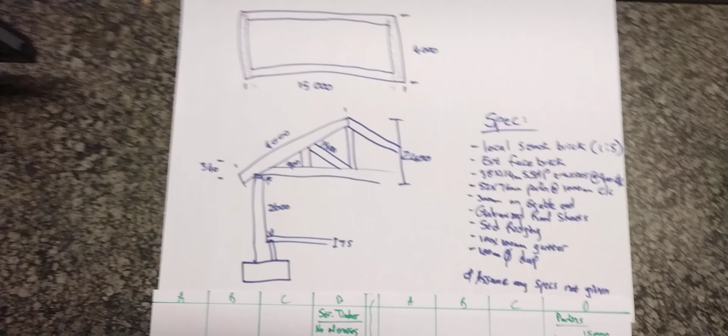Okay, so now that our brickwork is done, we can move over to our timber, our woodworks.

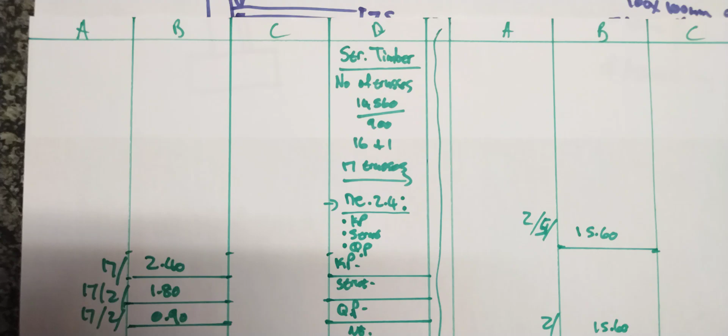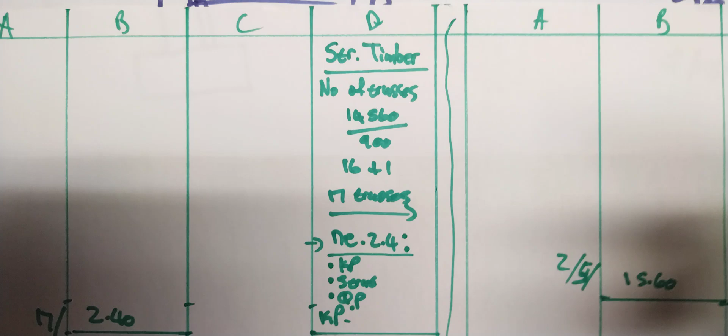Okay, number one on our list with regards to timber, we need the number of trusses. As we've seen in our specs, our trusses are at 900 center to center spacing, and our truss will sit in between the section on the wall plate. Because here we've got brickwork, our trusses don't sit outside of our building, they sit within our roof space.

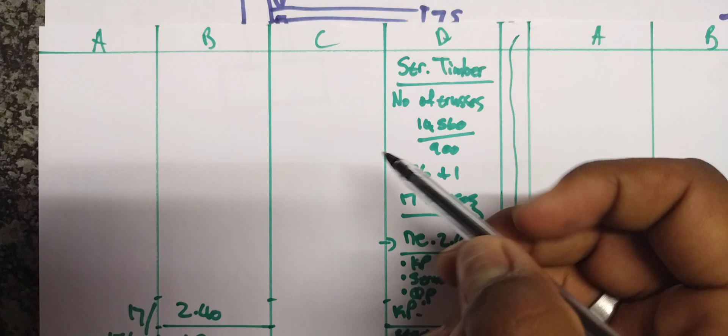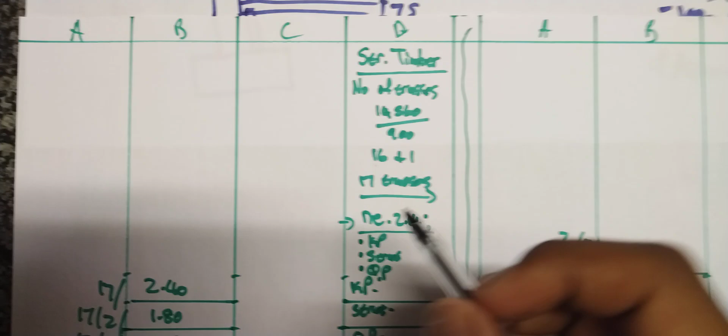So this is our length divided by our spacing, which gives us about 16. Then we will always add 1 to our tally, and we get 17 trusses. That's just a rule of thumb - we will always add 1, so whatever it is plus 1.

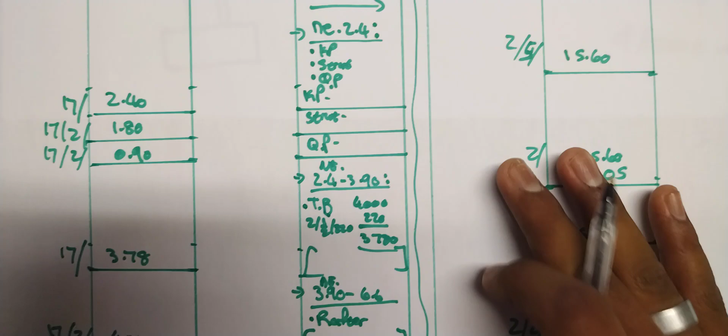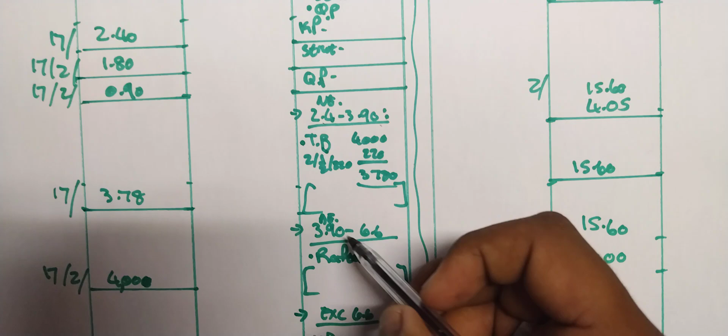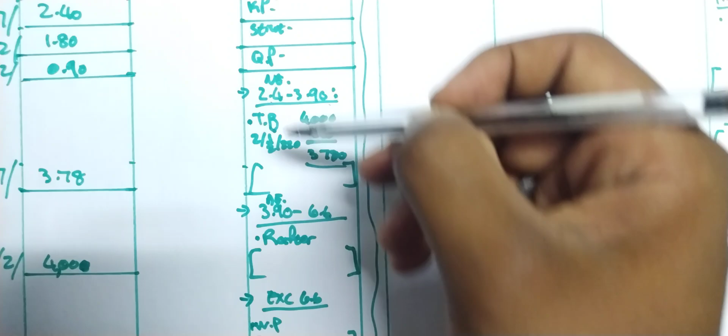Okay, important to note, we've got brackets when it comes to our timber, just to have everything in order. We've got not exceeding 2.4 meter, not exceeding 2.4 to 3.9 meter, not exceeding 3.9 to 6.6 meter, and exceeding 6.6 meter. That is our 1, 2, 3, 4 sections of our roof truss.

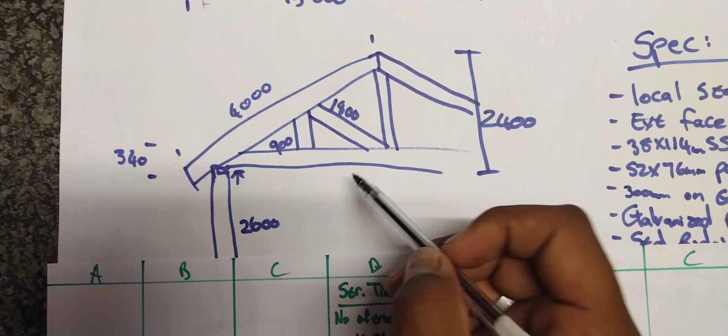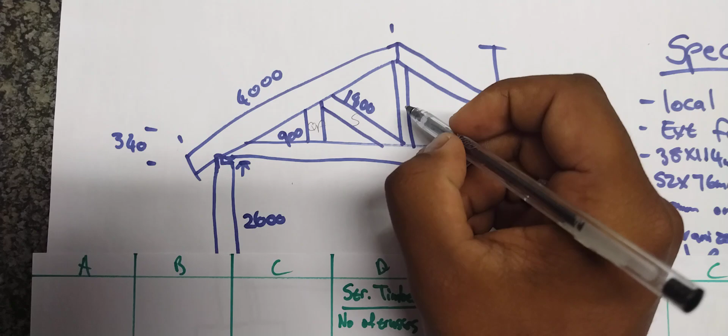Okay, so for not exceeding 2.4, we will come to our diagram here. Then we will see all our measurements under 2.4. So then we will see that our strut, our queen post, and also our king post are within that limit. Everything else is going to be over our 2.4, so we'll only record our king post, strut, and queen post.

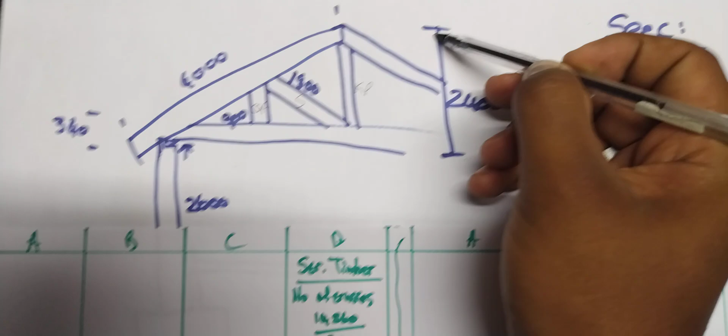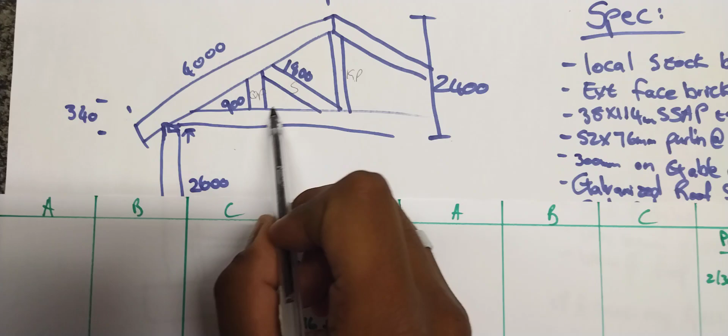Okay, straightforward. Our king post is 2.4 meter. There's only one king post within the truss, and there's 17 trusses. That will make sense in a bit. So we've got one king post within a truss, and we've got 17 trusses within our roof space.

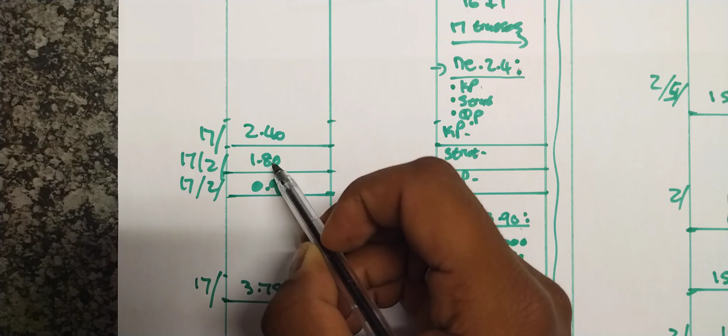For strut, it's a 1.8 meter strut. We've got 2 struts on a roof truss, and there's 17 roof trusses. So we've got a strut here, and we've got a strut over there - 2 struts per roof truss for 17 roof trusses.

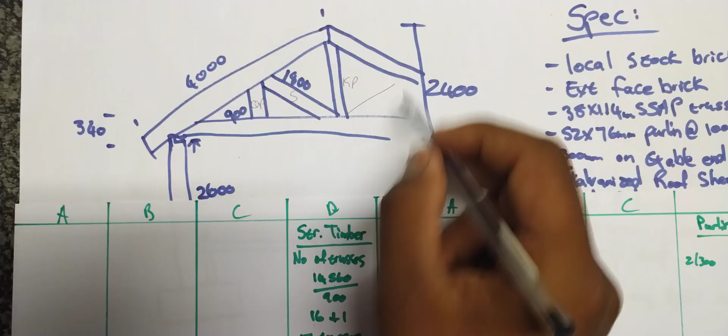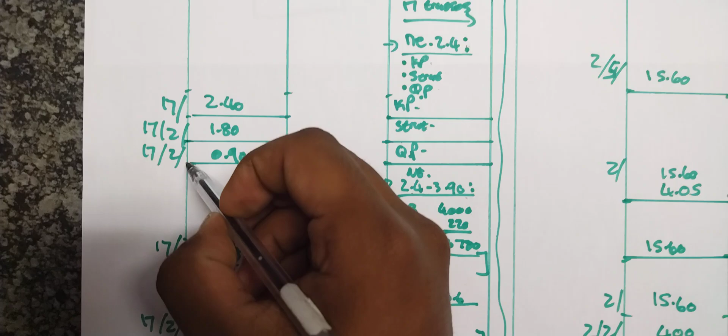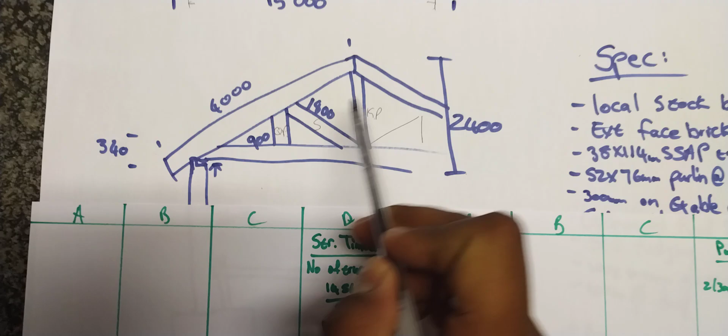Queen post - we've got a 0.9 meter queen post. We've got 2 queen posts for 17 roof trusses. So we've got a queen post over there, and a queen post over there. That's 2 queen posts for 1, 2, 3, 4 till 17 roof trusses.

Okay, so that's our one limit, and we've got 2.4 to 3.9. So we've got a tie beam. Our tie beam will sit across like that on our wall plate, over there.

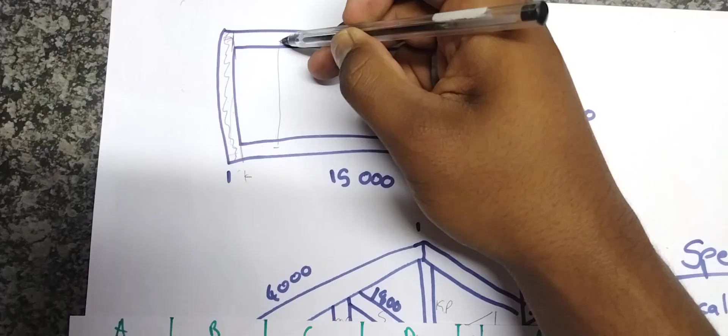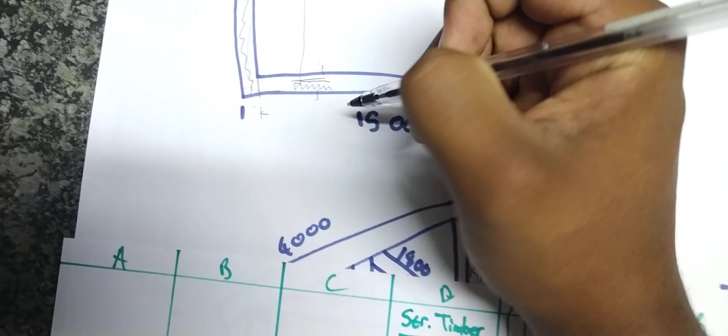Okay, so we've got our 4000 and our 220. Why 220? Because this is a 220 wall, and our wall plate is sitting in the middle of the wall onto the inside. Because here's brickwork, over on this one half, on the 110. So we've got 110 on this side and 110 on the other half. So 110 plus 110 gives us 220.

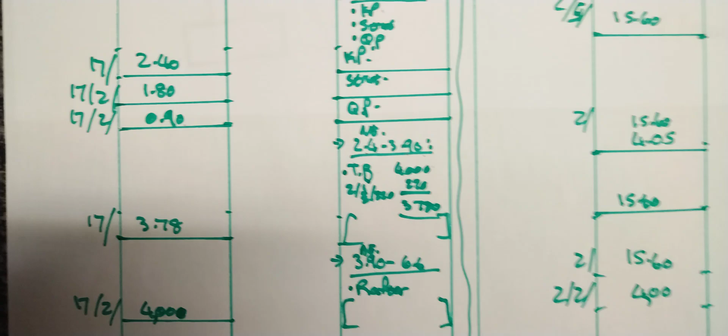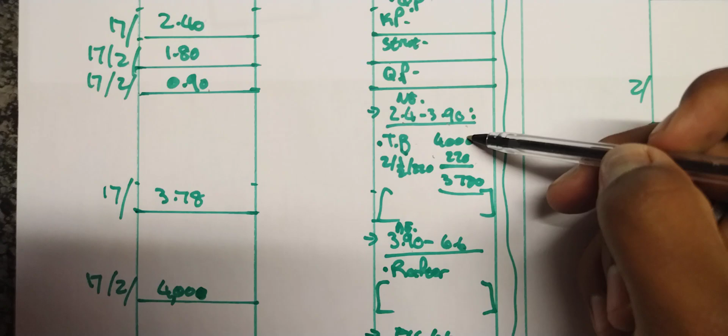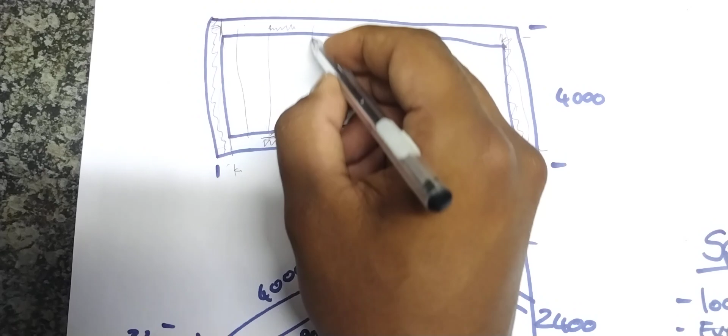Okay, so we will minus that because we have external dimension. We've got the external dimensions because we want to sit here on the inside for our tie beam. So then 4000 minus 220 gives us our 3780. We've got 3780 for our tie beam, and we've got 17 tie beams. So our tie beam is this length over there, sitting across like this, and we've got 17 of them.

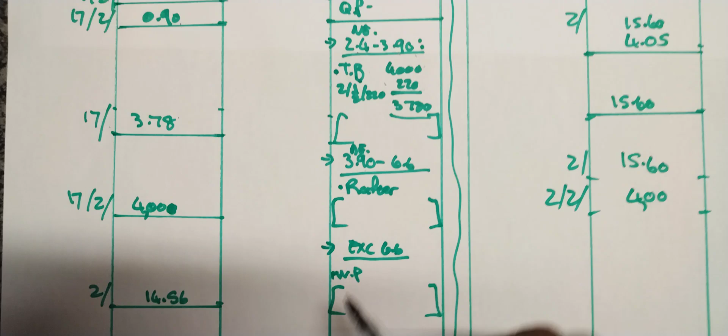Then we've only got that limitation over there. Then we've got our rafter. Our rafter is 3.9 till 6.6. So this is our rafter, 4000 millimeter rafter, or 4 meter rafter.

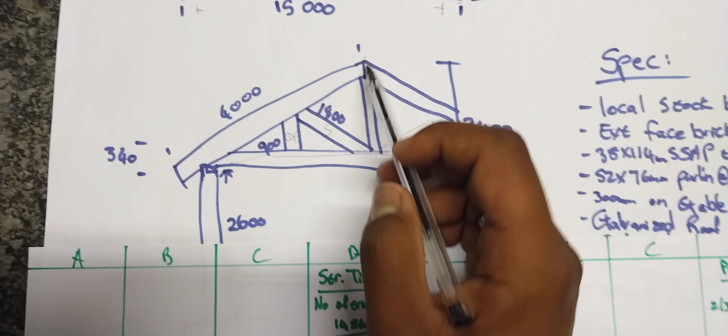We've got one rafter, two rafters - two 4 meter rafters for every truss, and we've got 17 trusses. So we've got 2 rafters per truss, and we've got 17 trusses.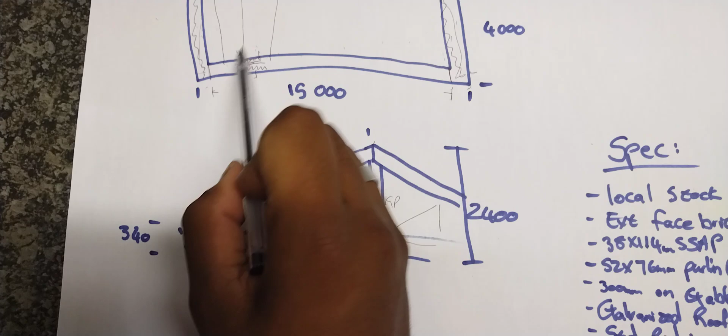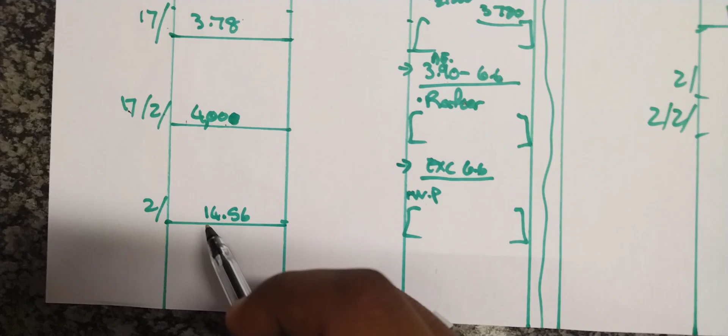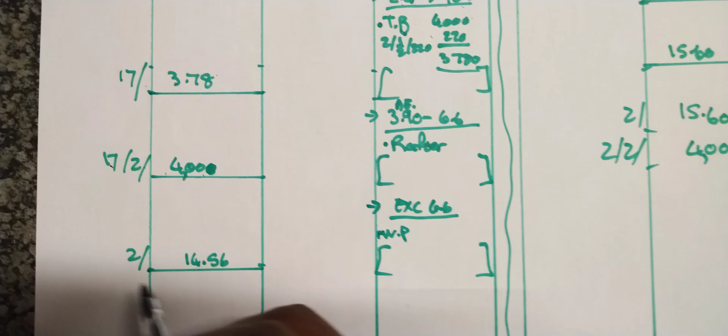Okay, so for exceeding 6.6 meters, we've got the wall plate. The wall plate will be sitting there on the innermost of the wall on the 110. We have a 14.56 - where do we get that? Because our wall plate will be sitting again on this inner side of the 15, and we've got 2 of 14.56 because we've got 2 wall plates, one on this side and one on that side.

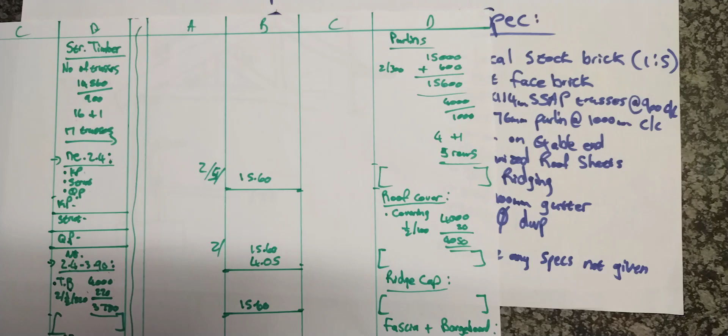Okay, so now that we're done with our truss, we can move on to our roof. On the top side of the roof, here we've got our purlin. So our purlin, we need our

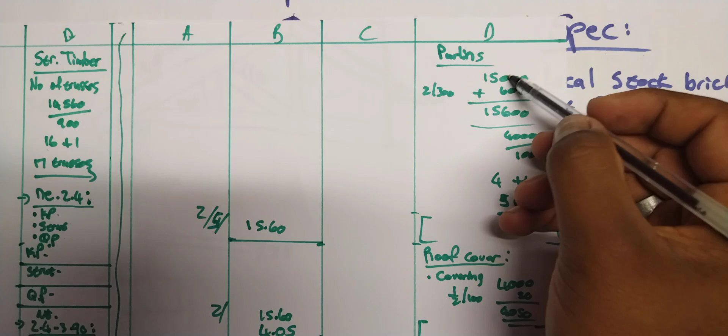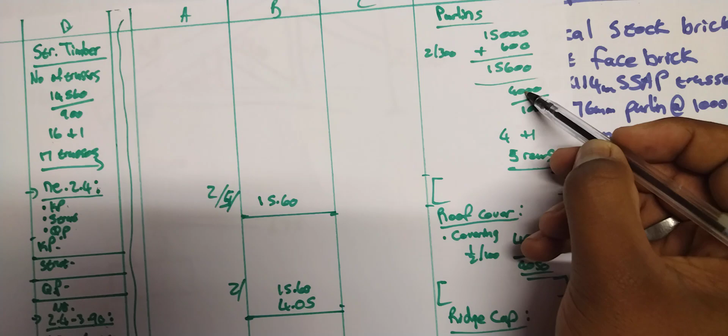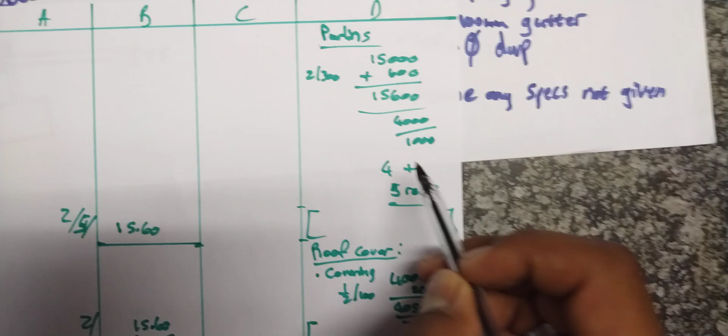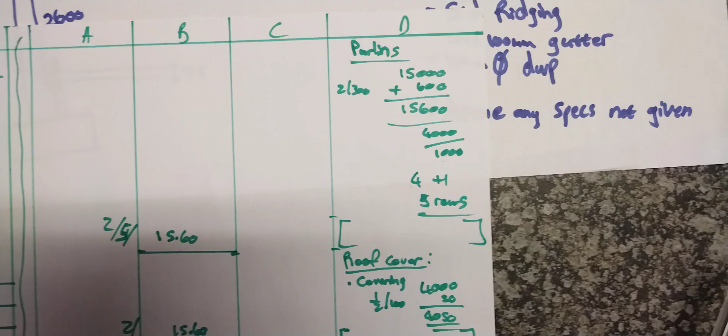spacing for our purlin. So our roof is 4 meters divided by 1 meter, we'll be 1 meter from. Our 1 meter for purlin is our spacing, center to center. So 4,000 - this is our 4,000, divided by 1,000 gives us our spacing for our purlins. So 4,000 divided by 1,000 gives us 4, plus 1 gives us 5. We always plus 1, same like our rule of thumb for our number of trusses, but this is our number of purlins.

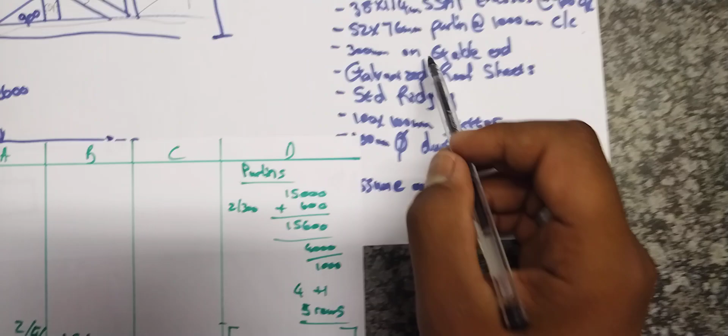Okay, so where do we get our 15,600? This 300 is on the gable end, that's our overhang, you can say. So it's our 15 plus our 2 of 300 gives us 600, gives us our length. So this is the overhang, 300 that side, 300 that side. So this is our length of our purlin, the length of the purlin.

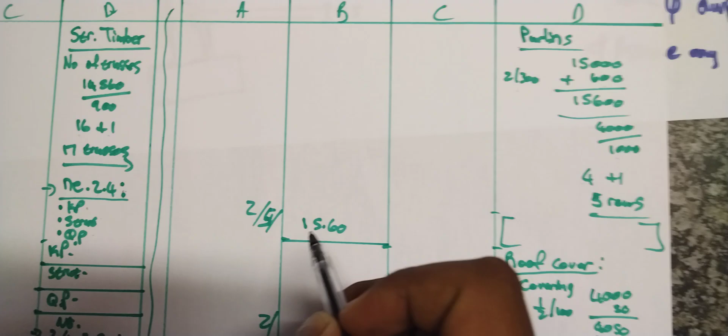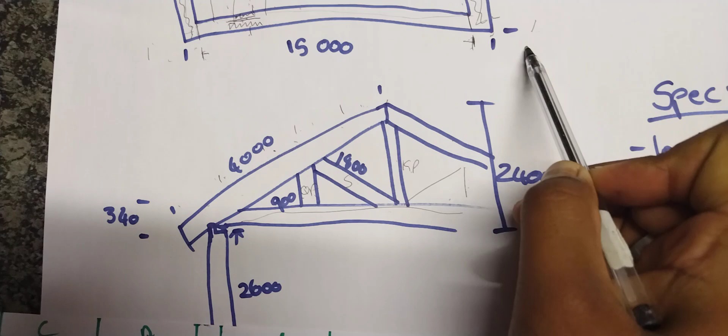We've got 5 purlins for each side of the roof, and then we've got 2 sides. So we've got 1, 2, 3, 4, 5 purlins there, and they are 15,600 millimeters, or 15.6 meters long, for 2 sides, this side and that side.

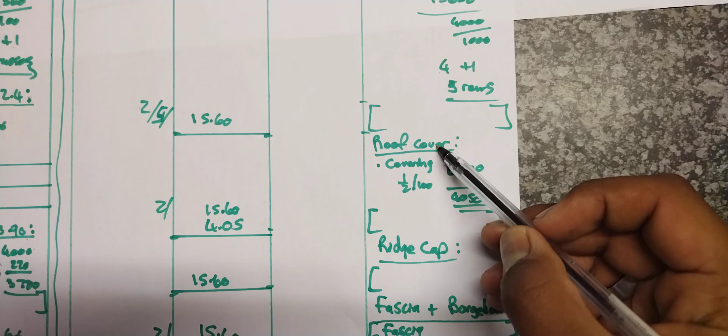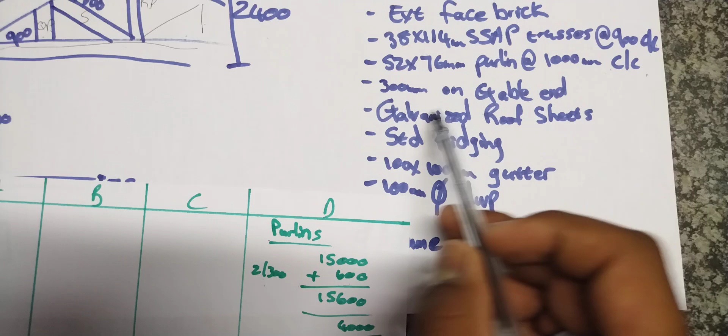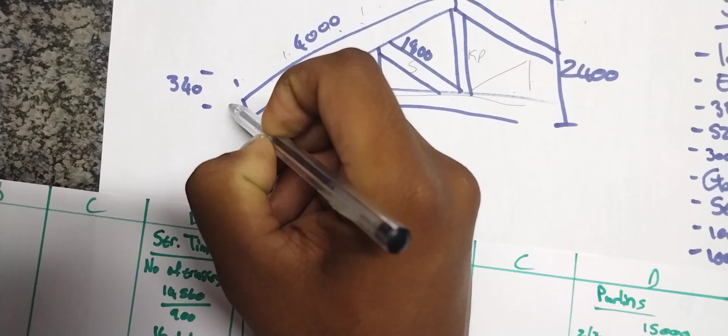Okay, then for our roof cover, we've got our sheeting, our galvanized sheeting - yes, our galvanized roof sheets. So then we've got, I believe this is overhang, so it's 100. It's gonna be 100, so it's gonna be like 50 on each side, yeah, 50 on each side.

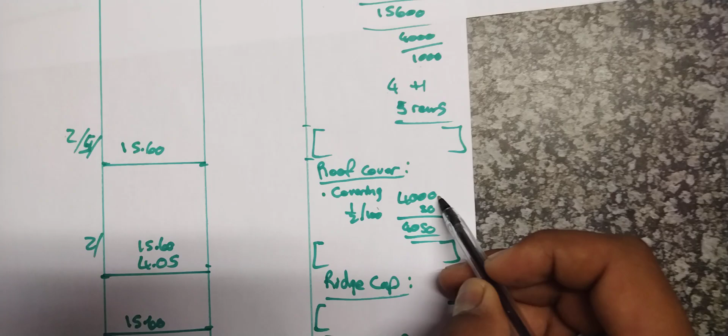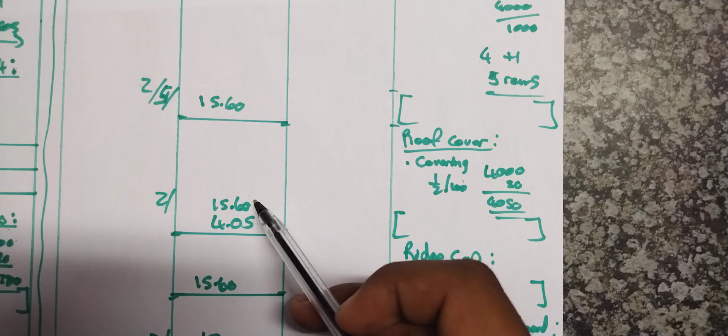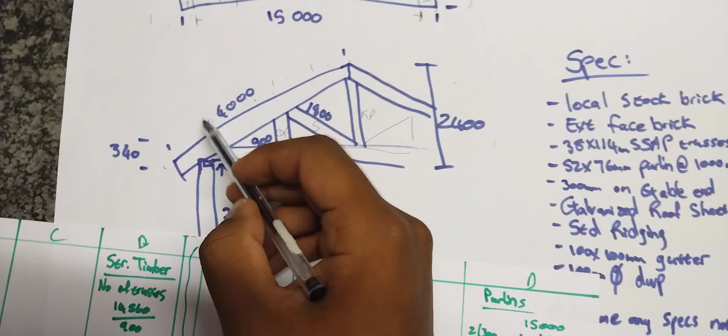So it's our 4,000 plus 50. Okay, so this is just our area of the roof. So this is the length of the roof times the height of the roof, basically. Length times height, and there's 2 off because there's 2 sides - one side, 2 sides of the roof, because both sides of the roof must be covered with sheeting.

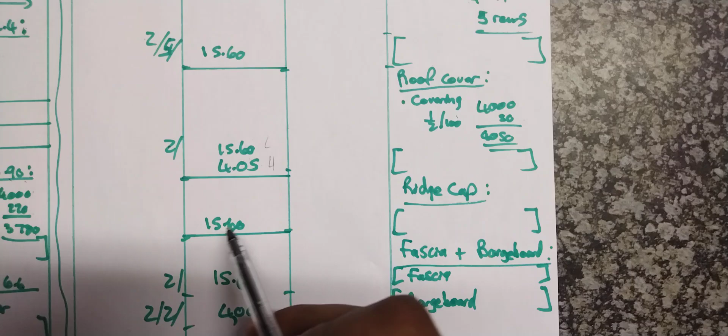Okay, ridge cap - if you don't know what the ridge cap is, on the top, it's that capping on the roof, normally looking like something like that, roughly like that. And we've just got, it's only 1 piece of tile, you could say. It's a whole row of tiles, but the length is 15.6, it will be running on the top side, center of the roof.

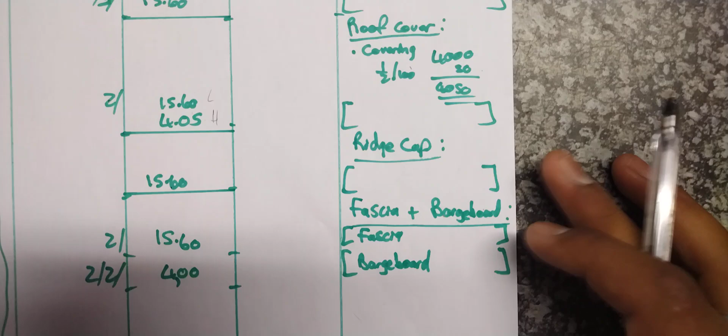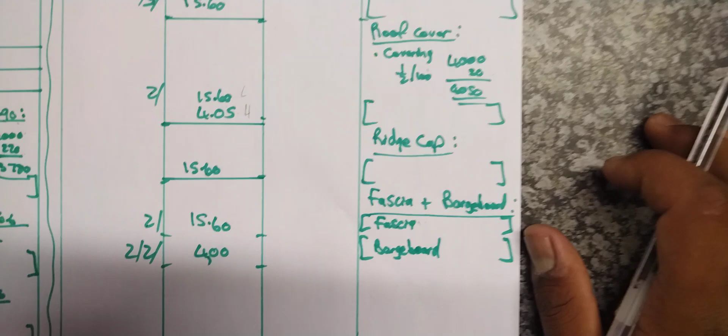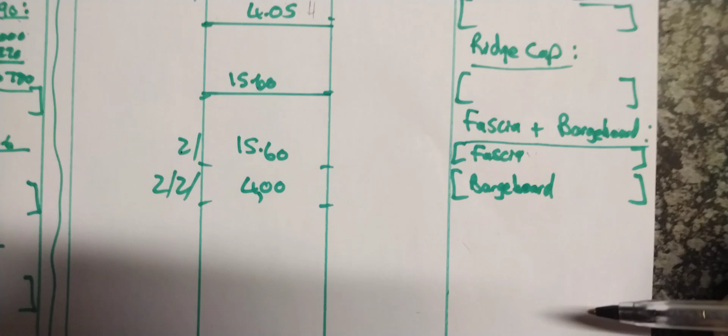Then we've got the fascia and the barge board. The fascia is this section of the roof. If you look at the gable in the front of your house, we've got two boards - that's the fascia board. Yeah, so we've got two of, because it'll be on one side of the roof. No, I'm lying - this is the barge board I was talking about, my bad. This is the barge board. The barge board is two of, there's two of the barge board at the front of the house.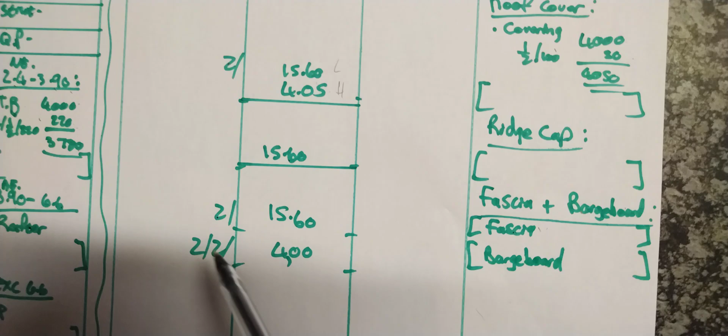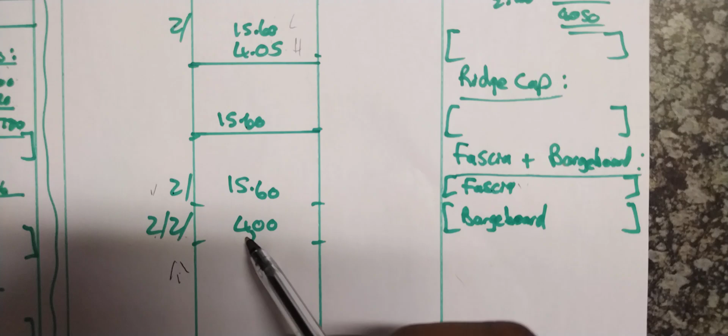Yeah, so this is the 4,000 and this is the 4,000. There's two of on each face of the house, the barge board, at the front of the house. So there's two of, and there's on two sides, the front of the house and the back of the house, that's where the other two is coming from. That's 4 meters, and then this 15.6 is the fascia - this is where the gutter will be fixed on. The gutter is fixed onto the fascia board. So we've got one fascia on that side and another fascia on that side at the length of the roof. So yeah, this is our timber for our roof.